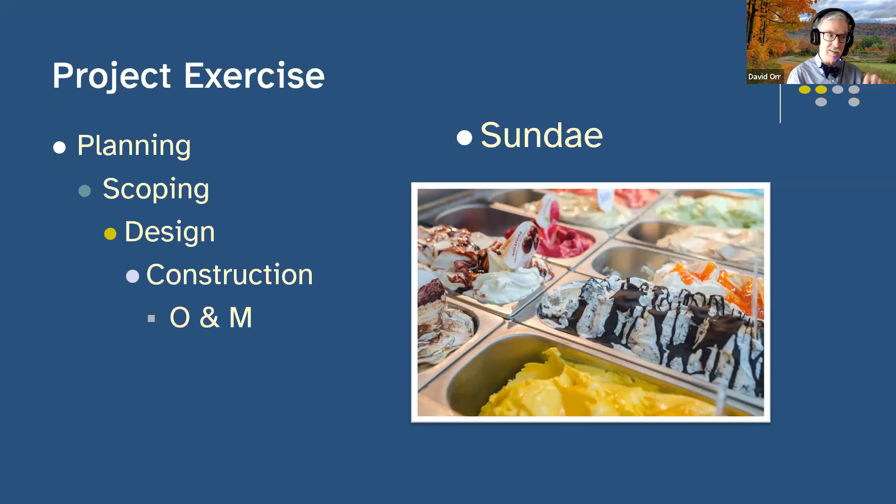Okay. Now, here's the rules involved. We're going to plan our ice cream sundae. We're going to scope. What do we want on our ice cream? We're going to figure out what the design is, what's it going to look like. I want you to think about what do you need to construct that ice cream sundae? And then at the end of it, you're going to do the operations and the maintenance activities so you're ready to make the next ice cream sundae. Because this is a cycle, remember, it's a cycle. So here we go, our scoping exercise for a sundae. We're going to build a Wordle.

Let's see what you put down for my ice cream sundae. Okay? You're going to build the ice cream. How big is it going to be? Absolutely. What data do you need to collect to build your ice cream sundae? You need ice cream. Very good. What flavor? Maybe you think about the flavor. Oh, you got a dish. That's good. What toppings do you want to put onto it? Sprinkles and cream I got. Good. You got a container to put it in? Okay.

You want many flavors. Yeah. What flavors are available? What toppings? Oh, you need a scooper. Very good. I got a scooper. That's good. How am I going to eat this puppy? Oh, someone's got a banana. Oh, somebody else is lactose intolerant. You got to have your lactose tablets. Oh, a spoon. Yep, that's good. Where are you going to store everything? Do you have a fridge? Okay.

Yep, it's got a freezer. Maybe you need a fridge too to store the cream and the cherries. Is there a cherry in? Yeah, who's actually doing the work? Are you doing it yourself? Is somebody else? Is this part of a big project?

Okay. You're getting closer. Oh, hey, very good. Somebody put in napkins. A good ice cream sundae absolutely needs napkins. Yep. I like it, the treadmill, so that you can get ready to eat the next one. That's good. That's good. When are you going to eat it? What's the weather? Is it outside or inside?

Okay. I'm looking for two more things. I don't see them yet. They're pretty important. Oop, they put it over in the Q&A. They didn't put it on the main screen, but I told you, you can always use the Q&A. You got to clean it up. When you're done with whatever you're going to do, you got to clean it up and you got to put it ready to make the next one.

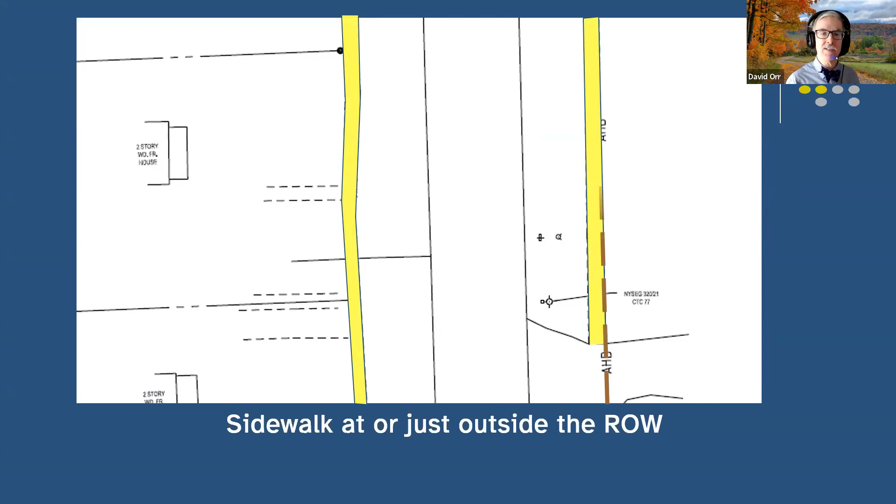So here is the sidewalk. I just marked it for you. Okay? And there's the other sidewalk. And then I'll put back in the lines that were shown on the survey so you can see the lines that exist. There's one, there's the other. Okay?

There's a question in the Q&A there, Amanda. Throw that into my pile that I'll add to later on for QBS.

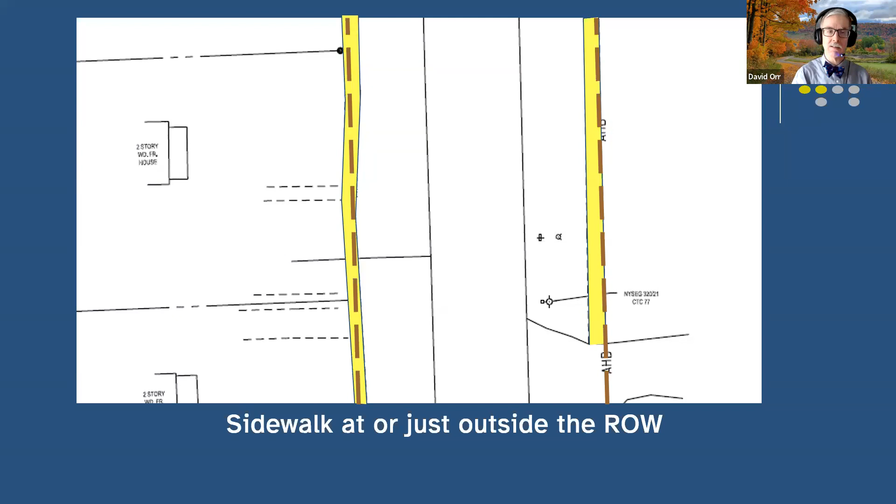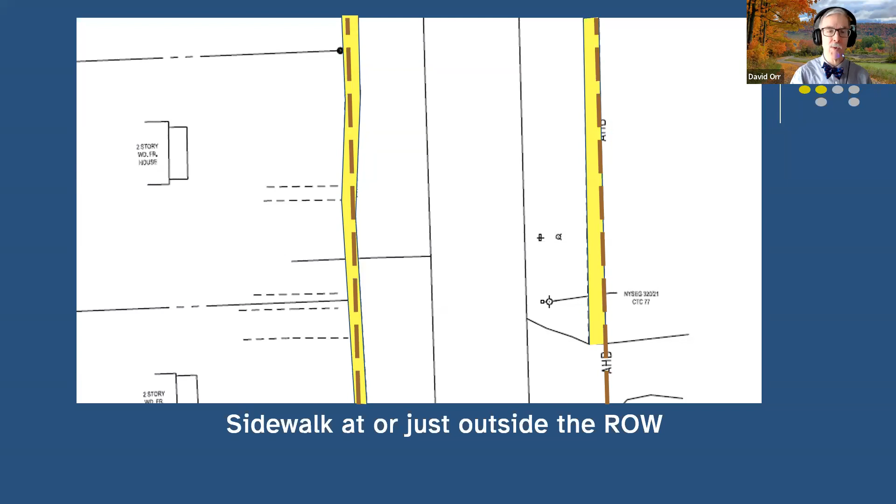So what would you have to do if you needed to work on that sidewalk? What would you have to do if you wanted to work on that sidewalk? Well, you'd have to get in writing an easement outside that section, okay? You'd have to get an access agreement or part of the deed that would be on there. If it was just a street by use or a road by use, there could be arguments about what that actually is because a sidewalk may or may not count. It certainly does not in the case of a town because that's not a highway function. So you might not even have that. That might be the apparent one that the surveyor used. So you're going to need an easement of some type.

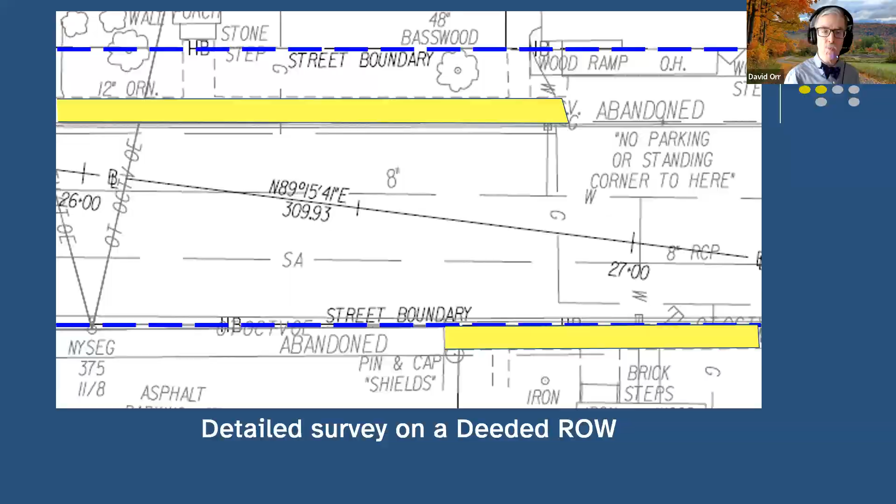So here's another one. I'll do one more. Okay. So I've got 4 clicks. There's my existing sidewalk. There is the boundary. In this case, there is a deed. They actually have a deed. Okay. So the deed shows the street boundary literally at the southern edge of the actual pavement. And the sidewalk is outside. So if you wanted to work on that sidewalk and put a sidewalk along the southern side, click on where you'd need to have a right-of-way when you're all said and done.

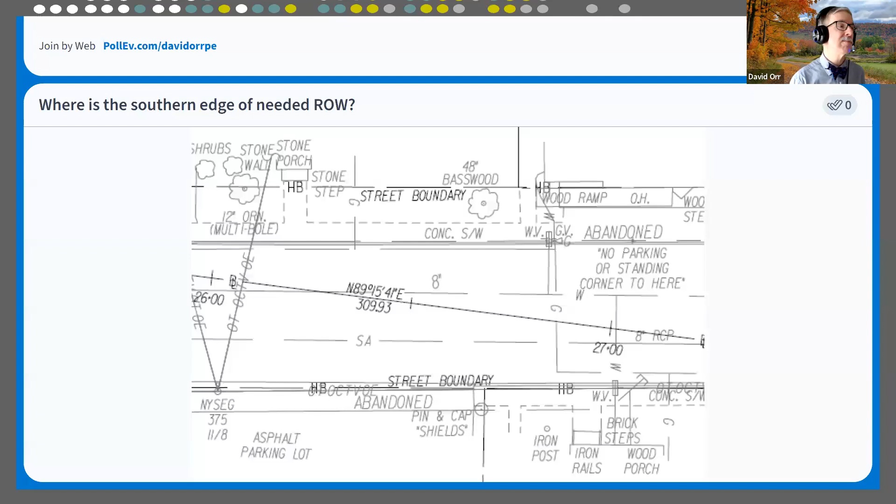If you're going to work on that sidewalk on the southern end, you're going to have to have at least the width of that sidewalk and maybe a little bit more. Okay? So that's going to be a challenge for you.

Okay? Now, someone noticed that NYSEG may purchase permanent easements. Yeah, you can purchase it. There's processes for purchasing it. Okay? And yes, there are some times when people say an easement isn't good enough. It does meet the requirements, but it's got to be well written and it really needs to be tied to the person's deed. That's going to be the key more than anything else.

You can't just do something that's an agreement that gets in a file. It really needs to be something that can be discoverable later on, if you want to think of it that way. So it's filed at the county clerk's office. So when you're going down looking at the deed, you're like, oh, there's an easement attached to that or now part of that deed that says what the right of way is.

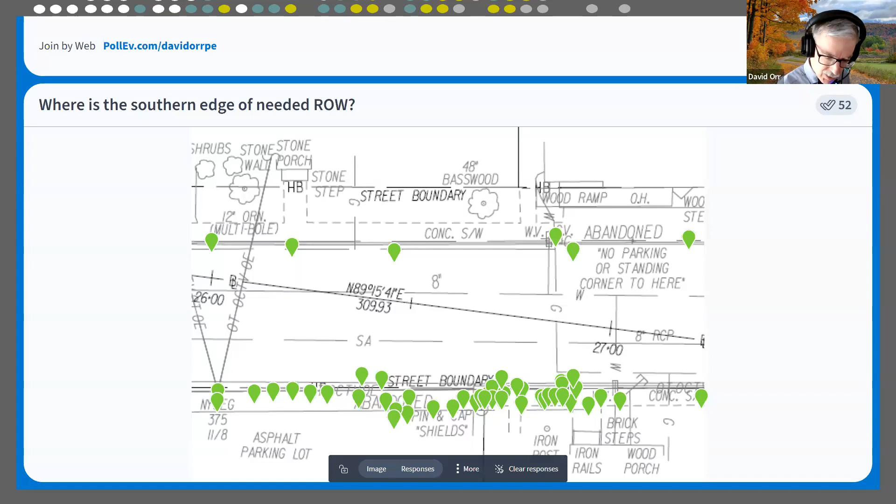In this particular case, myself, I can tell you right now. Oh, that's right. I have to go back up one. You're going to think about where you might want to be putting in your sidewalk. I'm going to try something here. Yeah, I'll go with purple today. And let's see if this trick works. It said it worked, and it worked for me earlier, but we'll see if it works now.

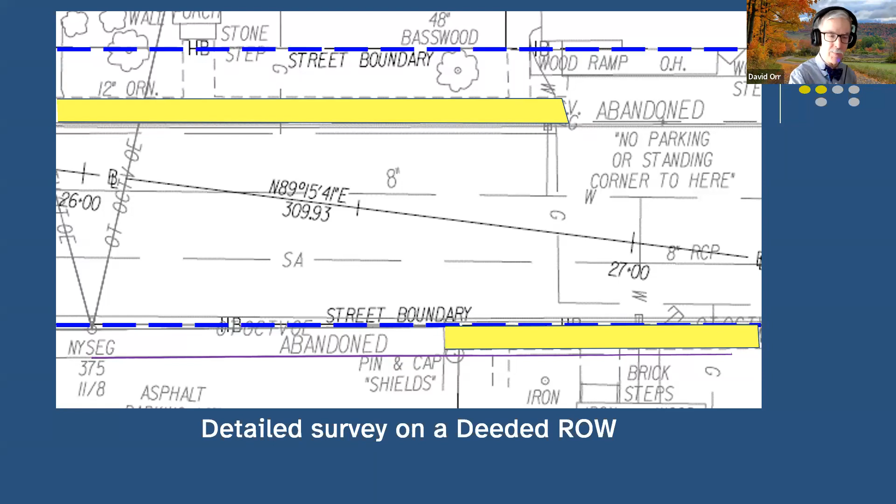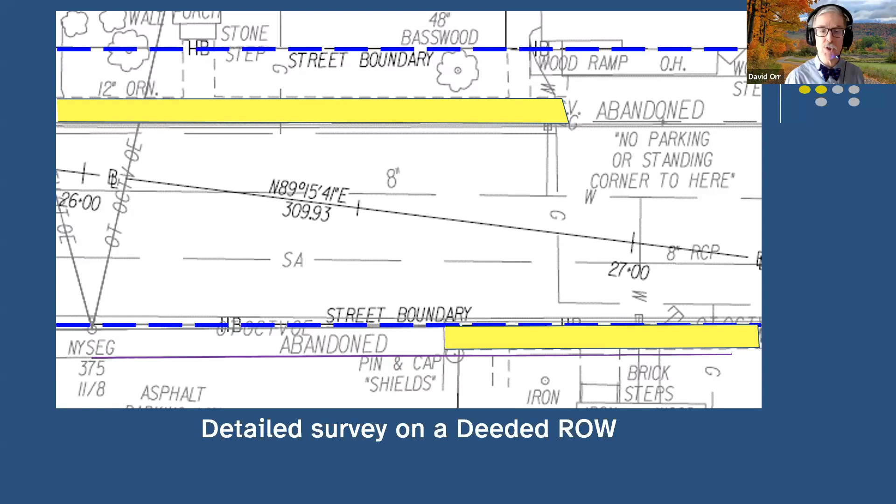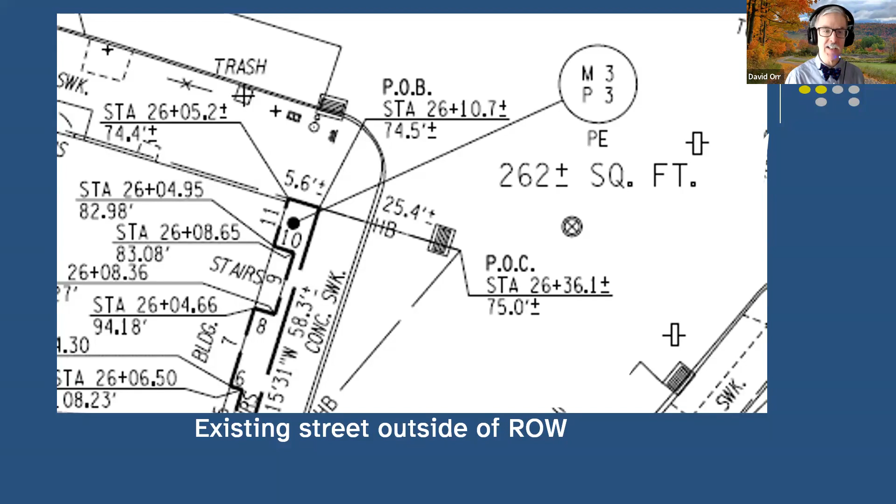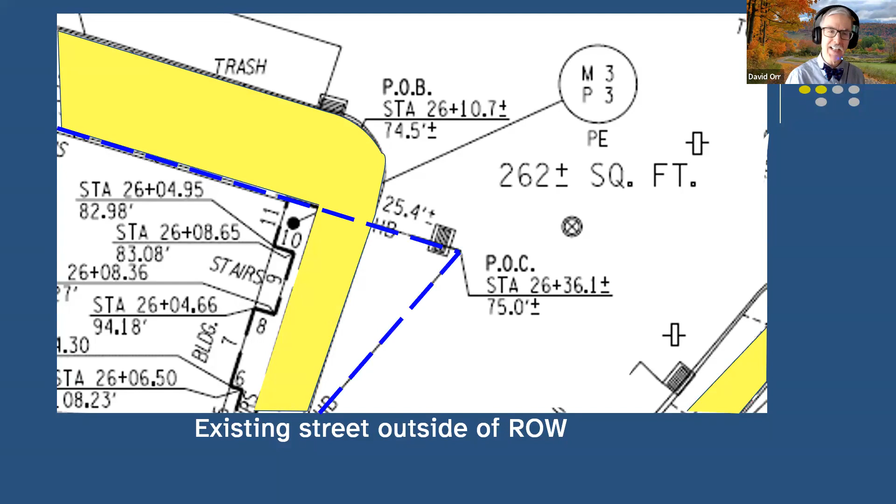Just a couple of examples that we got sent to us to illustrate the kind of craziness you can run into. Okay? So here is a sidewalk. The street is over to the right, where it says 262 square feet and point of curvature, which, okay, great. The right-of-way line is actually here. So you actually have this stretch of roadway here, right here, that's not in the right-of-way.

And oh, by the way, if it's a deeded roadway, it's not a road by use, you don't get that ability to say, hey, it's part of the road. No, you have to purchase it. You're going to have to compensate that person for their property. You can't just do the work because that's now a taking.

In fact, if you've got a road by use that's existing and you want to widen it, you can't just do it. You have to get permission from someone to do so. And in the case of federal projects, you got to get it in writing. And you're going to have to make an amendment and hook it onto their deed.

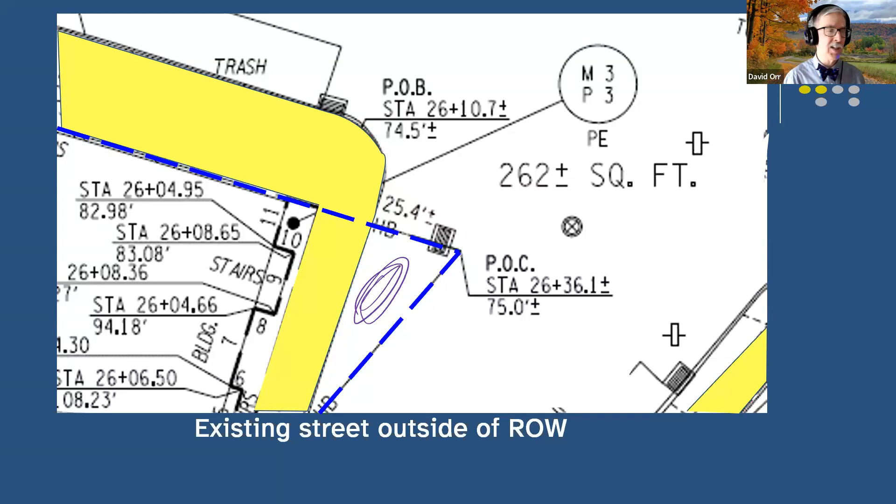Now, I know we have some folks from New York City. How many of you that are from New York City have gone down and looked at the Hess Triangle down in Greenwich Village? Anybody raise their hands? I got one person. Cool. Down there in New York City, there is a piece of property. When they did some road work, they moved things around. They moved some roads around.

They never properly took this small little triangle of land. That's now part of the public sidewalk in New York City. It's a 25-inch triangle outside of a convenience store. And so it actually was never properly done. And the Hess estate owners decided, we're just going to let folks know. Let's not get ourselves Hess triangles.

So we need to make sure that as part of your plans, and this is going to eventually go into what's known as a design approval document, which we'll talk about in a few minutes, you absolutely want to make sure you have existing property lines, proposed acquisitions, and whether it's going to be a permanent, long-term right-of-way, or if it's just temporary during the construction phase. Okay? And again, make sure you have plenty.

Don't shortchange yourself. Because when it comes to land acquisition, whether it's temporary or permanent, you don't want to be constrained too much. And if you need to purchase, you need to purchase. Okay? You can negotiate, okay? Or you can do an eminent domain or offer up to the amount of the appraisal, okay? But do you need more for construction? Okay? Keep these things in mind when you're doing right-of-way issues.

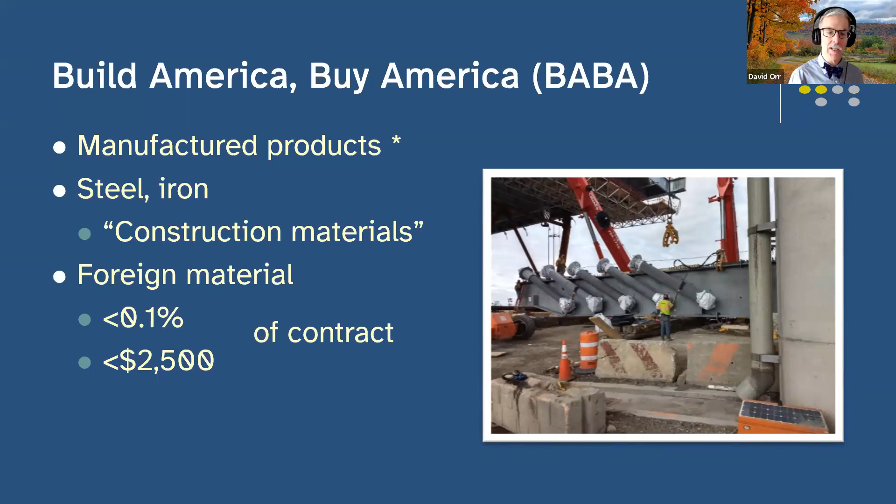Now, in terms of getting a waiver under Buy America, they have to be approved before. It says before installation, but really, you want to have it before you even go out to contract. There are very few nationwide things that are issued. I wrote down the last one I saw. The last one I saw was now over a year ago. I get a daily update from the feds. I may have missed it, I'll be honest, but I don't remember seeing a Buy America general waiver in over a year. That involved electric chargers. There were a couple of state-specific ones for projects, one in Utah and one in Louisiana within the last year, but they don't occur very often. There has to be essentially no other real good way to do it, or it's a de minimis cost, a very small grant. And remember, schedule is not the driver if the product is made in the United States.

So when should you include a waiver? Well, truth be told, even though it says prior to installation, I would actually include them at a minimum in the design phase and maybe even going further back towards the scoping or even planning phase. As soon as you realize you're going to have to be doing something that's not made in the United States for some reason, you want to let everybody know and get that process started. Don't wait. And again, the last one I had was for electric chargers. I haven't seen a new one since. I may have missed it, I'll be honest, but not many.

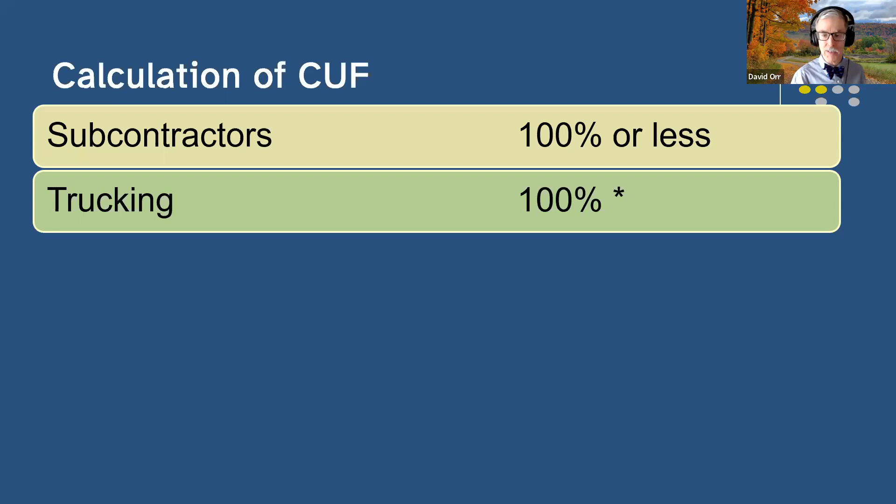In the case of trucking, again, it's 100%, but you've got to make sure that the trucks are owned and operated by the DBE. They're not just, again, sitting in the truck. Okay, so you've got to make sure that they've got that. And by the way, there's got to be at least a long-term lease. It can't just be borrowing a truck from somebody else. You have to own and operate it.

Regular dealers, delivery folks, it's only going to be 60%. Okay, that's a brokerage. That's about the best they can get. But the manufacturer, on the other hand, is at 100%. If you're hiring somebody to do service, like for instance, a lot of consulting firms use accountants who would fit under those requirements, well, reasonable fees and commissions count. Okay, so again, look at those things. That's the kind of thing that's important to understand when it comes to counting things like that.

Okay, if you can't get enough folks to do a commercially useful function, you can't meet the DBE requirements, you can do what's known as a good faith effort. So give me an example of what you would have to do to get a good faith effort to show that, hey, I can't find a disadvantaged business in my area to do a particular activity. What kind of things can you do?

And while you're answering that, someone asked in the Q&A, so DBE delivery of materials does not constitute a CUF? The delivery could, if they did all the work for delivery, but if it's delivered by a regular dealer, then it wouldn't, if that regular dealer wasn't a DBE. So it would come down to who ordered the bar, did the DBE actually do the work or not? That's what it's going to come down to. Okay. But yes, we're looking for good faith effort stuff.

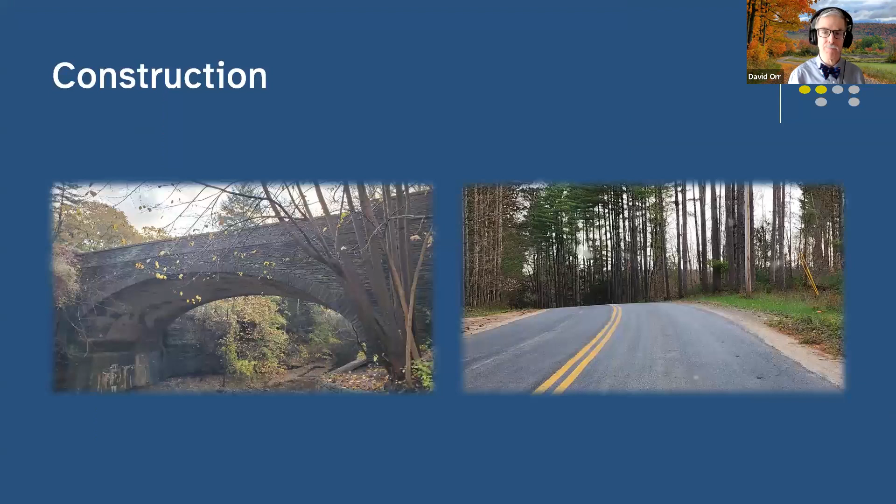So we're into the construction phase. We're doing our bidding and awarding. Okay, so to bid and award a project, you have to open the bids publicly. Okay, you open them publicly. Everybody sees the bids. Joe Dokes Enterprises, $1.34 million. Jane's Construction, $1.33 million. You then analyze the low bid. And so if the low bidder, in this case, Jane's Construction, is responsible, she can meet all the things, she's a winner. Now, you review their DBE plan and you get approval from the DOT.

Let's say that the companies that put in the low bid didn't have a plan for DBE, but said they were getting one. They have 5 days to get either additional subcontractors or DBE qualifications through commercially useful functions, or they've done enough work they can illustrate a good faith effort. They give them 5 additional days. Okay?

Good question. I don't know if the public postings on a bid board are available. I think they have to be done in person. But I'm going to put that into my pile because I can. We'll ask the folks from the DOT and Federal Highway. Cool thing about having a Q&A.

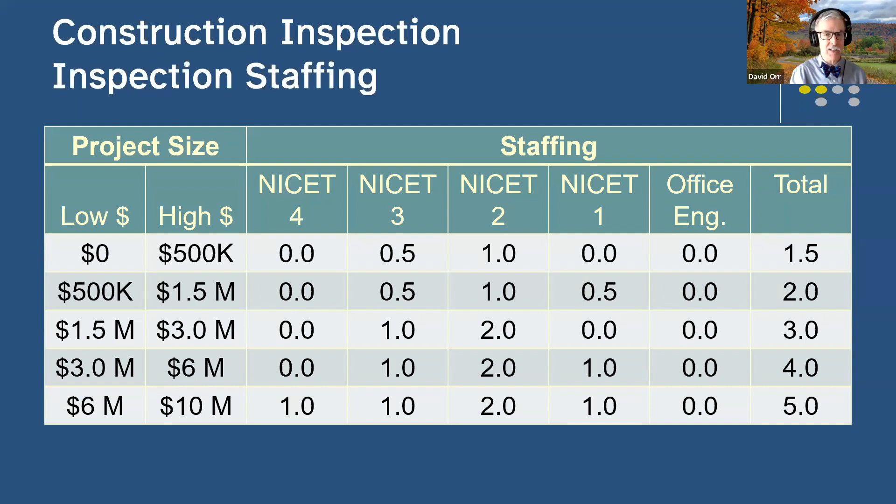Now, I'm only showing you up to $10 million size projects, but I know a lot of you have bigger projects. The table that's available in the local projects manual goes up to $1 billion. Above $1 billion, I think you need to talk to your RLPL or the state and the feds about how many we actually need to have for inspections.

Because the job of the inspections is multiple. First off, they're obviously there to help with the contract administration and the documentation of the project. They're really going to help you with records management and coordination. But if you really think about it, the real job of the inspector is to make sure you got what you paid for. Okay? And if they see something, they need to say something, not just document it and put it into the box. So you really need to tell people what's going on. And hey, there's an issue here.

New York State DOT will be doing some inspection as well. They'll be sending people out in certain situations. And their goal is to assure FHWA that the contract is meeting the federal requirements. And they're not doing the day-to-day inspections, but the idea will be to look at making sure that everything has been met according to the FHWA requirements.

So the job of the inspector. A lot of folks think the job of the inspector is to do observations because in the writings it says they should observe the conditions, the criterion that are being followed, the cause for any defects, the effect of those causes on the overall project, and they're done, right? Well, the problem is if all they do is write it down and put it into a book, does it make things better? No. So the real job of the inspector is to not just observe these things, but to then figure out and let somebody know so something can be changed.

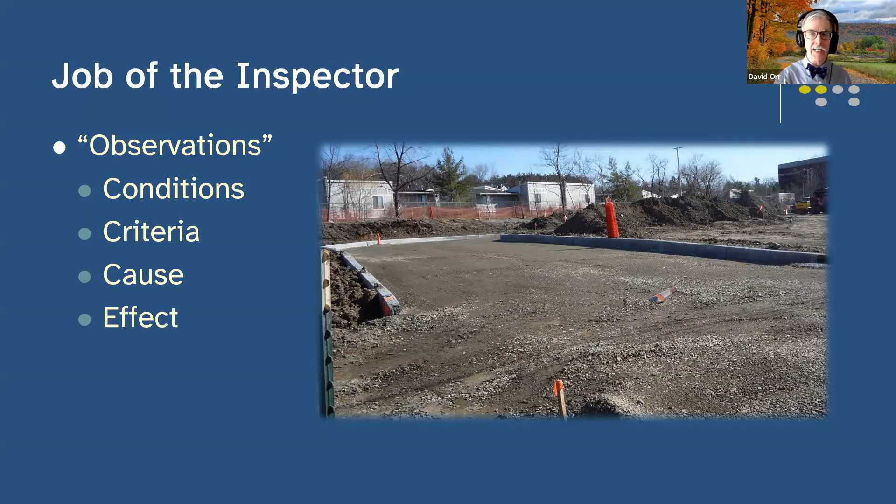Now, some people will say, well, hey, I inspected it and I made all the notes. But if it gets put in a drawer, it doesn't do any good. You've got to let somebody know so it can be fixed. Okay? Now, if this was on a brand new site, it could have been they over-tightened the bolt or they didn't put on the proper lock nut. If it's on an older site where they're inspecting it, it could be the bolt sheared or rusted. But the key is you've got to figure out what needs to be done. Let somebody know who can get these things changed.

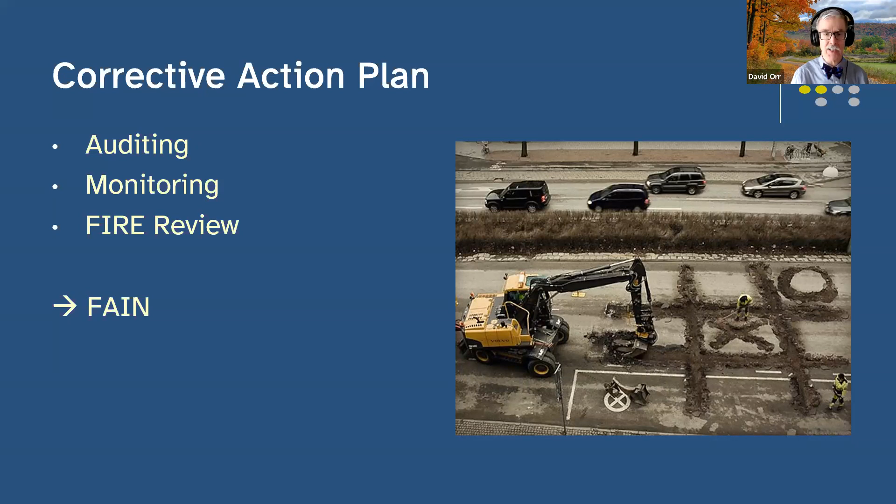So if you can't do something, the ultimate expression is to go to a federal aid ineligibility notice, or FAIN. We don't want that, and neither does FHWA nor does DOT. Those occur when essentially you're not able to correct the problem, and there's not a way to overcome that. So if you poured structural concrete and you have no way to test the quality of the concrete, well, then you would have to be thinking about getting a FAIN, though there are exceptions to that. And I'm just going to share an example or two of that in just a second. This is all outlined in chapter 3.

Okay. So looking at the Q&A, I'm going to stare at the Q&A here. Do you see a couple of possible issues here where, if inspectors were looking at this, they might pull some funds because you weren't following standards protocol? What do you see here? There's no PPE on the worker, no vest, no hard hat. There's nothing protecting the end of those rebar.

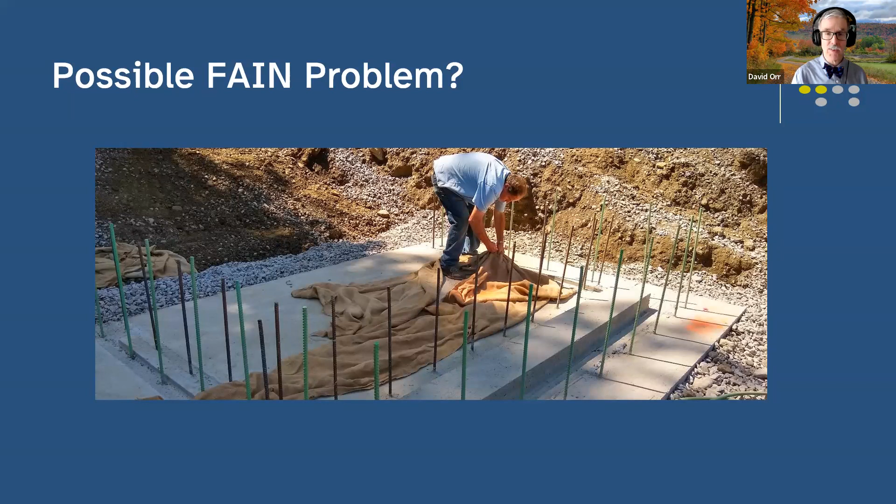Okay. So you really need to have those things, or they may threaten to pull some funds. Most likely, if they see that once, they're going to go, hey, you need to correct these things. They see it a second time, or maybe depending on the level, they might say you're going to have to put together a plan to improve things. But at some point, they may pull funds from you.

So how about this one? Do you see any problems here? There are two that should be pretty obvious. There is nothing to protect that water. It's an erosion problem. You really need to do a much better job of getting water safely through the site and clean. There's no silt fencing.

There's no erosion control. They're working in the stream itself, and none of the people are wearing all the PPE they have to have. You really need to have a vest on. That is actually a requirement. Even though this is a semi-closed project, you still have to have a vest on in this particular case. So again, think about what people need to have. If you're not sure, ask.

Now, in this particular case, this is one where they did the concrete testing. I told you. Normally you'd be thinking, what are we going to do? Well, they decided they would go to the effort of testing the concrete. So they had people come in, drill cores. The cores were then taken back, and they were compressed. It was a sidewalk job.

I think it was Safe Routes to School, but I'm not positive on that. It cost them $40,000 to do all of the testing that they had to do. The project only netted $50,000. So in other words, they spent most of the money they got doing the testing. At some point, you might go, well, I guess we're going to have to take that hit.

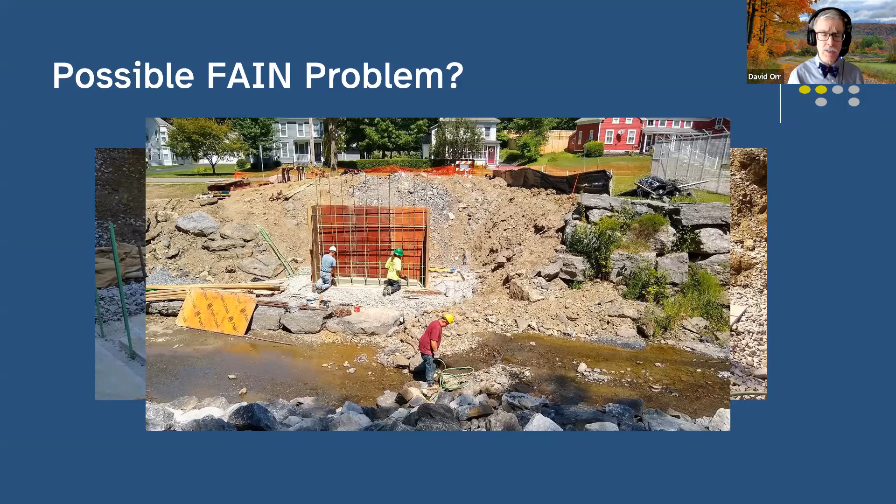Okay. Someone asked for the last one, is that safety vest or flotation? You have to have a safety vest, the type you have in a roadway, in every case. Flotation would be required only in certain streams. Again, what is the proper PPE? Do you see a possible FAIN problem here?

So can you think of some other things that might come up that you'd be in threat of losing funds? And they're both structural things and paperwork things. So let's see if you can come up with just a few. And then we're going to close this project out. Not meeting the DBE requirements. Yep. You forget to do proper shoring. Yep, that's a good one. In fact, got one in the Q&A and one in Poll Everywhere at the same time.

Cracks that are structural. Yeah, some issues with the materials. Yep. Work outside the right of way. You failed to follow the Uniform Act. You didn't do a proper job with your work zones or your PPE. You didn't do a good job with your record keeping. They really hate that one. It sounds minor now, but 50 years from now when you're looking at it, you're like, what did they do? That could be important.

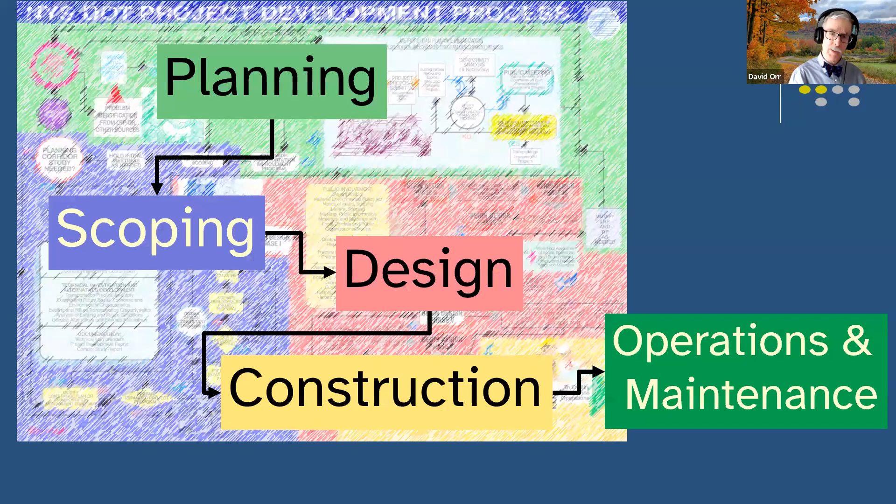Audits are audits. Okay? So now we're going to maintain this. And remember, when we're maintaining it, it's no longer a federal project. When we're maintaining it, it's no longer state oversight. So you're going to be operating and maintaining that facility. Now, realize how are you going to fund it? How are you going to pay for this? What is the maintenance that you have to do? So what I recommend to anybody when you're doing a project, go back to the beginning when you're planning and identifying it and think about when it's done, what's going to be the annual cost? And how do I make sure in the annual cost that I cover every single thing I need to cover? Because otherwise you've got the situation where you could have an issue.

So maybe you change your design and change your bridge design for less maintenance. Maybe you use a little stronger post for a sign so it lasts a little bit longer with good breakaway hardware. So that's why I like to do the entire project on paper before I go and read the notice of funding opportunity, or just after I have, before I apply to decide, is it worth it or not?

And what is the most important thing? Tell me in the Q&A, what's the single most important thing? What do you think the most important thing to have a successful federal project is? Yeah, very good. Yeah, it's communication. That is by far. It is the only answer that every person I asked as we were developing this class, every single one of them said communication was the key to success. So you're thinking, well, what do I do? Where can I get some assistance? So where can you go to get some help?